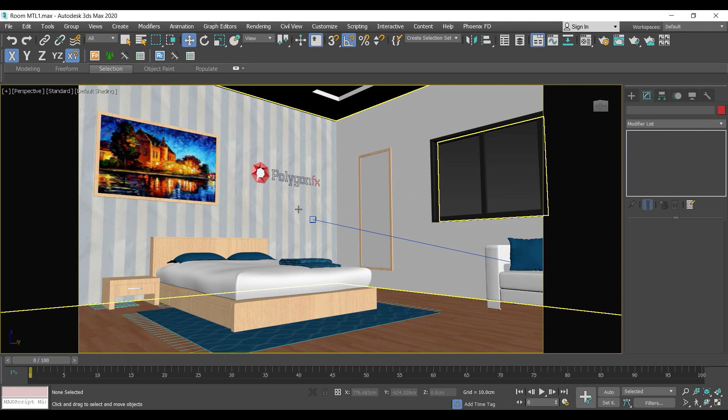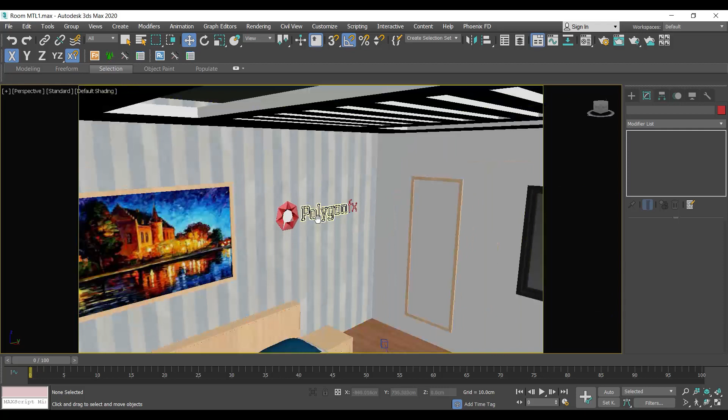I have a camera in my case, but it's not a big problem. I just added a small frame in here, and I added some kind of ceiling from the top, as you can see, so I can have indirect lighting if I want to work as an interior. I also added this logo that we've created before, and I'm going to make it like a neon light if I want my logo to lit. I created this as a 3D shape, and I'm just going to work with it as lines. I have a window, and this is my chair, and that's basically it.

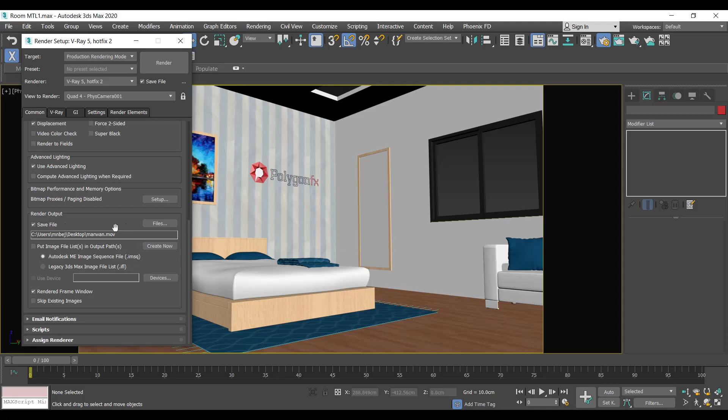It's just empty still - we need a lot of things to have inside, but I think it's fair enough to start with. I'm going to go to my camera and do a render as usual, just a small rendering and animation in here. I'm going to reset it as before - we'll talk about these later on. So I'm going to render, and as you can see, it's going to be black because I have no lights, and I have my GIs on, which is perfect.

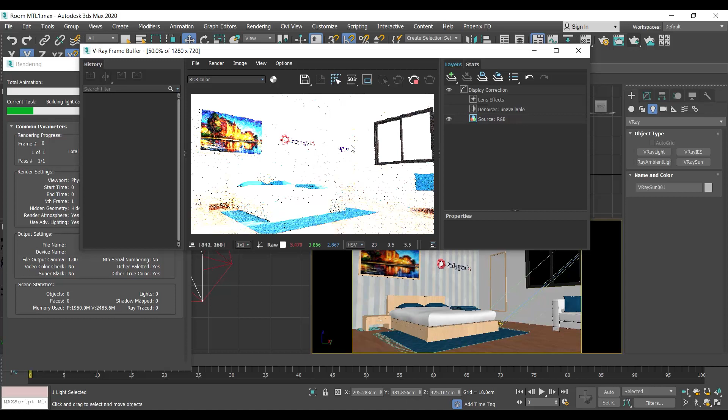Now the first thing I want to do is introduce the Vray light sun, the Vray sun. I'm going to go to Vray lights and sun, Vray sun. I'm just going to create a sun that's going to be entering the window in here, something like that. I'm going to have a sky, and make sure this sun is coming from above, and I'm going to render. Definitely in here I can play around with the values.

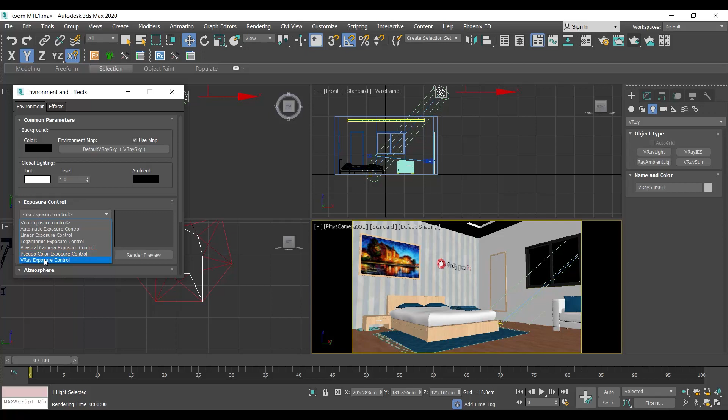Okay, great. In my case, because I have a camera, I'm not just going to work with the exposure control of the camera, because I didn't talk about them. I'm going to do the same thing as before - go to rendering, environment, add exposure, Vray exposure control, and that's it. I'm going to do the render again, so that I don't have to repeat everything.

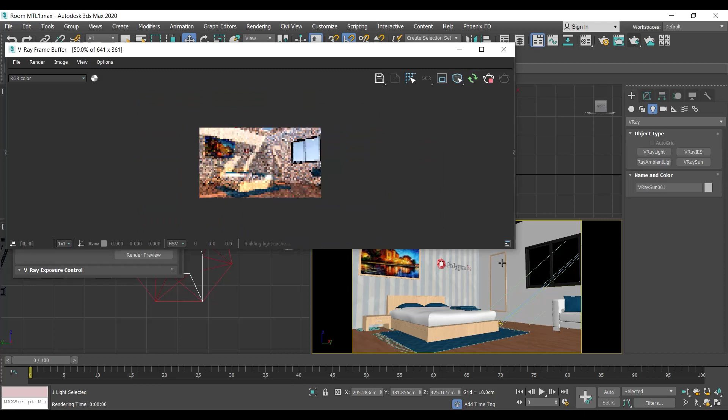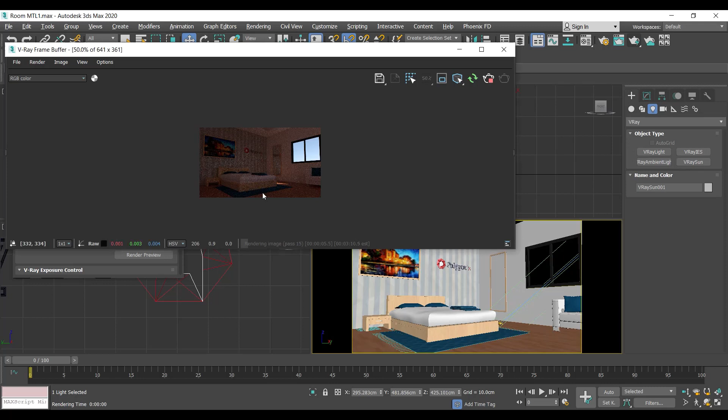Okay, great. Now, as you can see, I'm missing the ceiling from up - I just have the direct gypsum. So I'm going to pause this and right click, unhide by selection or unhide by name. I'm just going to unhide the box, because I have some other things that are still inside. Perfect. Now, as you can see, this is my render I'm starting with.

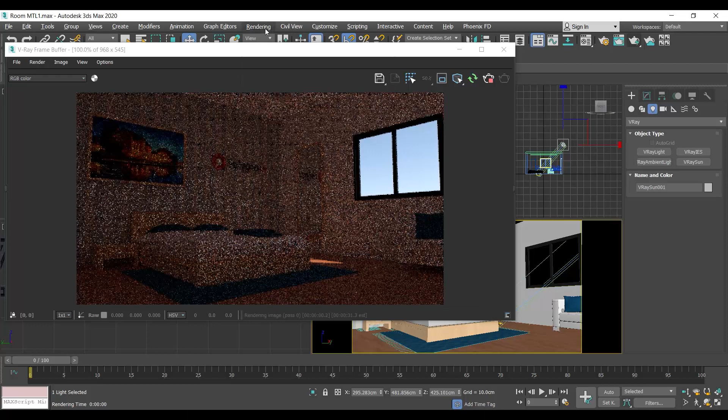So the sun is coming from the window, it's bouncing on the floor, and it's having this kind of light. I can definitely go to the sun or go to the exposure control and bump it a bit more. So I'm going to go to rendering, environment - in my case it's still opened, I think, just behind.

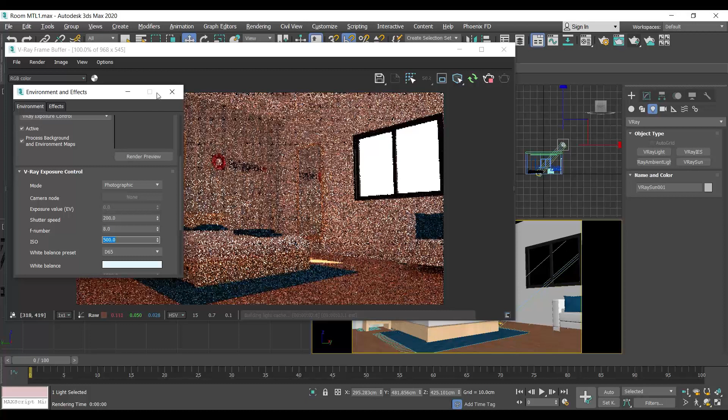Okay, and maybe have the exposure ISO at 200 instead of 100, and definitely it's going to be brighter. But if I go a bit more brighter, let's say 500, it's going to become a bit overexposed. As you can see from the window, the sky is almost super bright, and the sun in here is kind of also overexposed. So maybe I have to be something in between - I don't want it to be 500, maybe 300 should be fine, but that's it.

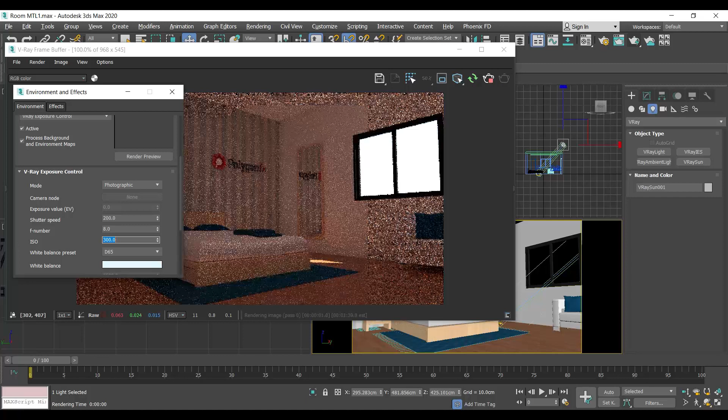So now what I'm having is just a sky and a sunlight, that's it. And this is what I'm going to get. Definitely I'm rendering low res, so I'm not going to have good quality render, but I'm just seeing the overall lighting - that's the bounce of light around the room.

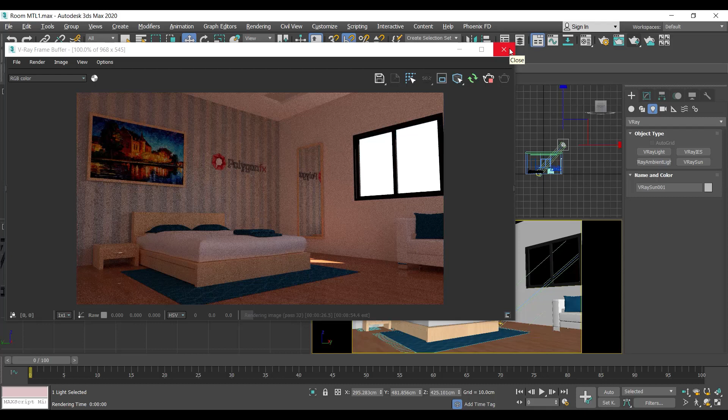Now what I'm going to do is introduce a small light which will make things sometimes better. I'm going to go to lights and introduce Vray Ambient Light. Vray Ambient Light is a very simple light - I'm just going to place it, doesn't matter where.

I'm just going to put it in a place where I can see it so I can select it anytime. So I'm going to put it here, just in the center of the image. And I'm going to go to modify. As you can see, it's just simple. I can enable and disable the light.

The light mode is going to affect the direct light and the GI, or the direct light, or just the GI. GI means global illumination or indirect lighting. So this is the direct lighting from the sun. If you wanted to affect this light, also make it brighter, so the sunlight where it's bouncing in here, it's going to make it brighter, or both indirect lighting or just GI. In my case, I want only the global illumination.

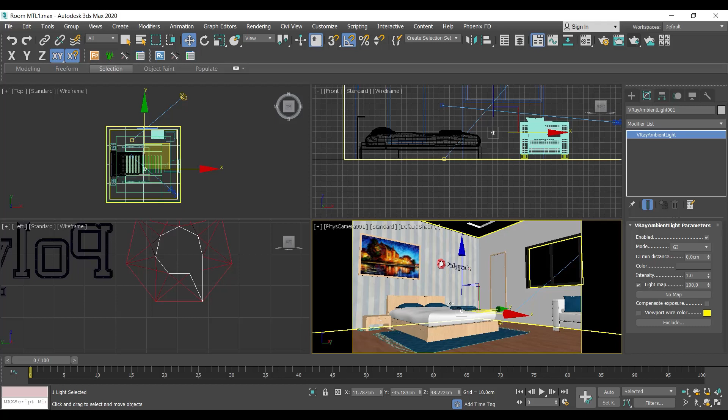I don't know exactly how it's going to be, so I have to stop this render and make it active, and I can check it from here. Now I'm going to have the color be something, maybe warm, so I'm just going to go back to warm, add a bit of warm with a small tint of blue, something like that, maybe less.

As you can see now, the scene is lit better. This is because of the ambient light I'm putting in. The intensity is 1, maybe it's too strong. I'm just going to put it at 0.5 because I want to see the depth of the light. Some places are more lit than others. I'm just going to go to 0.1, maybe 0.2.

You can play around with the ambient light. Ambient light is just a fill light. It fills up the scene with an ambience, which is a specific color and light. In my case, I'm adding it on the GI. You can add it on direct light and GI, and you'll see in here it's going to be brighter, or you can add it only on the direct light. In my case, for interior scenes, I will add it only on the GI to fill it up, and I can add a different color.

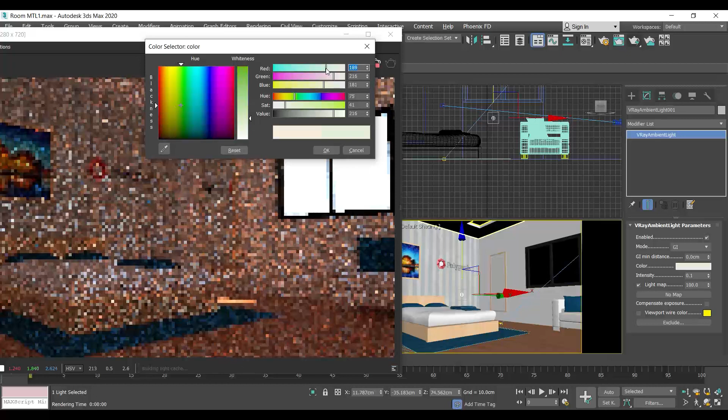Maybe I'll make it something more bluish, and add something more cool light. So maybe something like that, more light from the sky in my case. But right now it's at 0.1, so I'm going to put 0.5. As you can see, it's more lit, more blue color in the scene, and you can work with that. Now I can also add an image as a texture, to get more varied colors, not just one color like blue, or whatever.

Basically, compensate exposure is the link between the light and the camera. In my case, it's fine. I'm just going to add it without having a link to this.

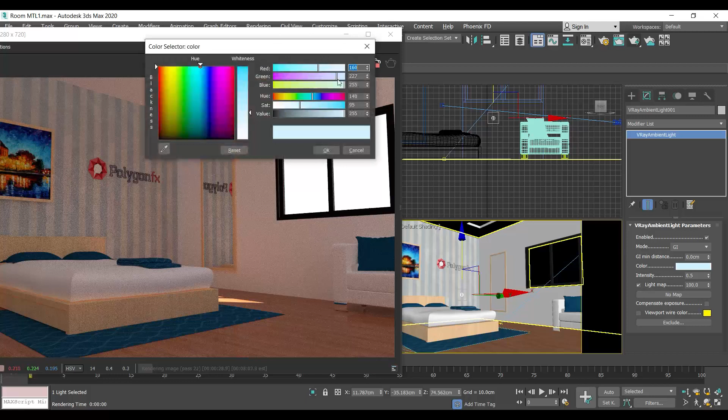So in here, as you can see, it's more blue now. I think the light is a bit strong. I'm just going to make it less blue, maybe a bit more warm, so I don't want it to be so visible. Something like that, and I'm going to make it a bit less intense.

So this is basically the VRay ambient light. Now I have some kind of interior shot with sunlight, without any other lights. Just a daylight having sun and an ambient light inside to fill up the environment, because the scene is small and what I'm getting from the light from this opening is not enough to get all the lighting.

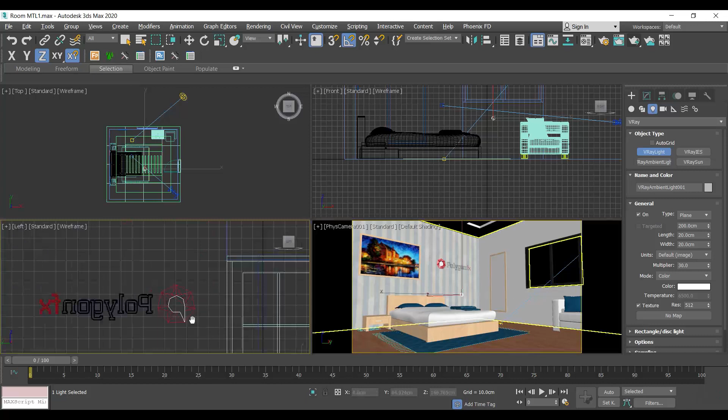Now another thing that is also useful sometimes is to have a VRay light, as I said before, on the window. So this is my window. I'm just going to add a VRay light and make sure this is outside and pointing inward. I'm just going to rotate this 90 degrees, place it on the window, go to modify, and press on skylight portal. As you can see, once I press skylight portal, I cannot affect the intensity of the light and other settings, so it's just going to be a portal for this.

Now I can just render, and it's going to add more visible light to go inside this window. I can also add the same one on the door, which is behind us.

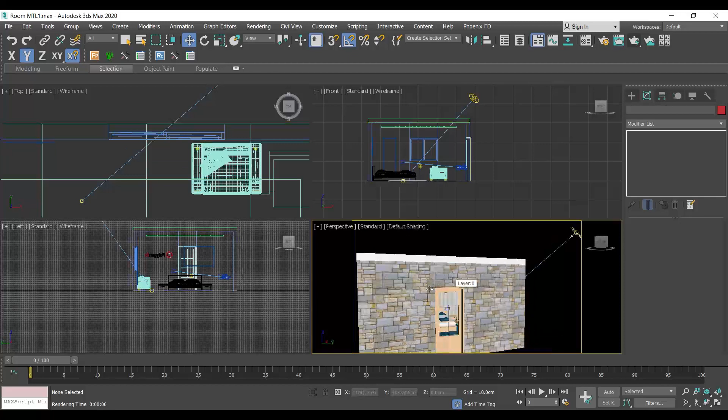So this could be another option that would help with the light penetrating the windows and the doors. I'm just going to go to perspective to show you a bit more. So this is my door because I have a glass in here, and I have a glass in here, and this is basically it.

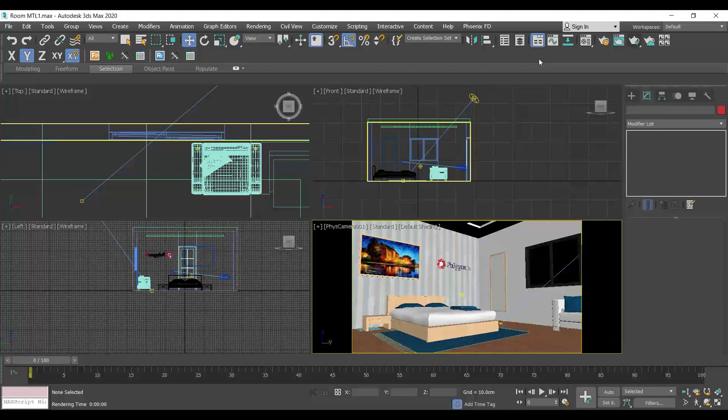Now, this is basically the first type of light I've used, which is daylight. So I just created it, and I can see it's maybe overexposed. So let me just fix this ISO, just gonna put it 100 again. I think I just didn't realize that. Okay, so something like that.

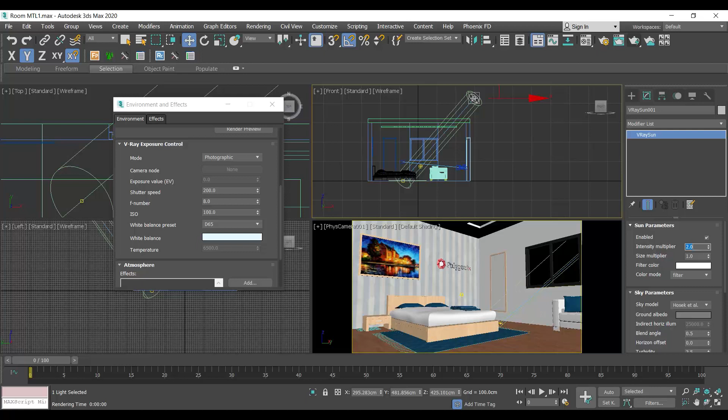I want to see the sky, I want to see the sun. I'm gonna make the sun a bit more intense, so I just select the sun and make it maybe 2 instead of 1. And I can just render it out.

So I'm just gonna make this active all the time. So it is fine, but it's a bit strong in here. I'm just gonna make it maybe not 1, not 2, just 1.5. So maybe this is what I want. Okay, it's a bright sky, and this is it.

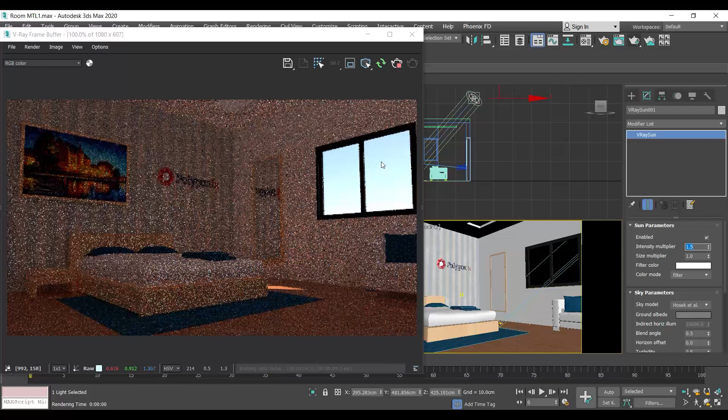Okay, great. And now the ambient light, I can make it a bit stronger, so maybe 0.5 again. I'm gonna do the same thing, just deleted it, and I'm gonna add my portal lights.

So this is going to be my portal light again. I'm just gonna make it portal. Okay, and I'm gonna copy this again and rotate it, and I'm just gonna place it on the door.

Okay, I can see it from here, so I can just scale it down. You can scale it by scale, but usually I prefer to have values. So something like that, maybe something like that, and I'm just gonna place it in. Technically, I need it to be just smaller.

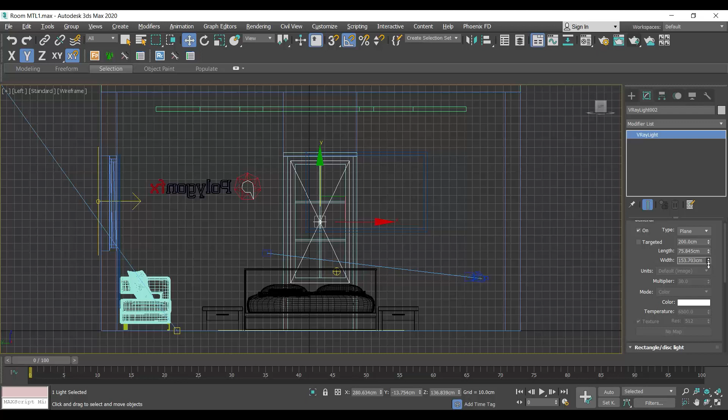I don't need it to be as tall as the door, because the opening is just in here where I have the window in here. So I'm just gonna make it as small as possible so I don't waste a lot of things going on. And I'm gonna push my light inward because the door is inside, so in here. And definitely I'm gonna have a skylight portal.

Now if I go render again, I should have more light coming in. Definitely the light is coming in still very weak. So now it comes in handy if I want to have my ambient light a bit stronger. So obviously it's going to be stronger.

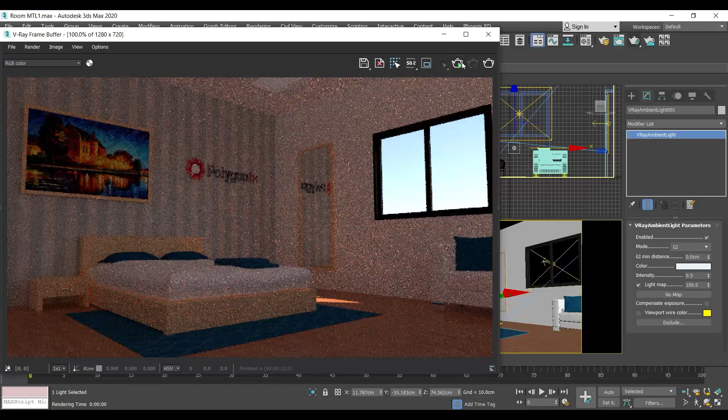So I'm just gonna make it visible, so I'm gonna make it 1. And I think this is much better. Okay? I can definitely make it 5 if I want to have it more lit, but I don't want it to be super bright. Maybe 1 or 2 should be okay. I think this is fine, or maybe 1 even is fine.

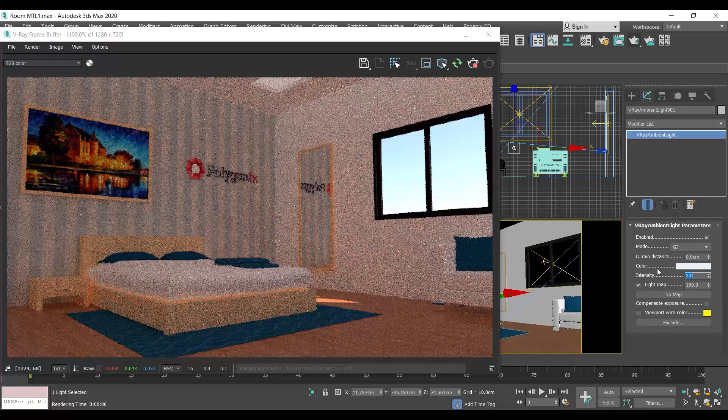And I can see now all the materials. I can see the ceiling, I can see the floor, I can see everything I want. So I can just wait a bit for the animation, for the render to kind of finalize. But I think this is basically a good thing.

Okay, that's great. Now, if I want to have internal lights, so interior lights, instead of having the sun from outside, I'm just gonna delete my sun. Okay, I don't want my sun, so just delete. And I have to go to my rendering environment. I'm gonna delete my environment sky and don't use the map.

So now I can delete also the portal lights, but in my case, they're not much of importance. And I can delete my ambient light, or I'm just gonna disable it. Okay, so now if I render, it should be black. Okay, there's no light in here. So I'm gonna light the scene from the inside.

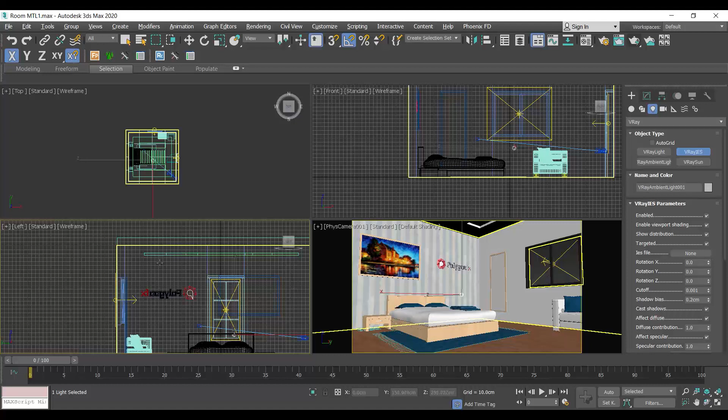Now, the first thing I'm gonna do, I'm gonna introduce a new light, which is called the VRayIES. VRayIES, they're just a simple light. Okay, I'm just gonna draw them, let's say from here or anywhere, it doesn't matter. Let's say I'm just gonna point them over this painting. Okay, so the painting is, sorry, this side. So this is my painting in here. So I'm just gonna place my light over here, something like that. Okay, great.

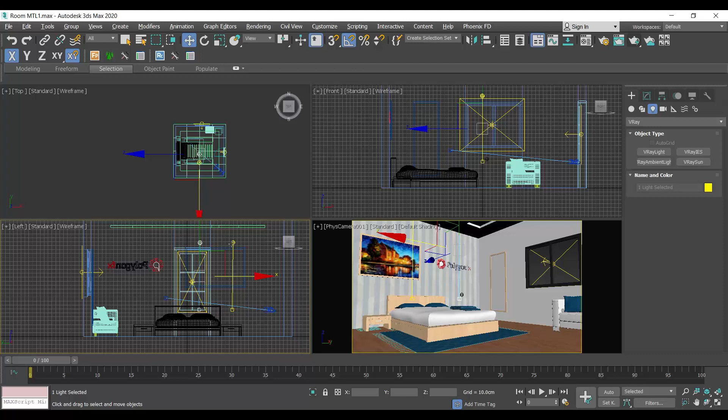I'm just gonna select them both. I'm just gonna shift and drag and copy them as instances. Now I have 2 lights. I'm just going to place them above the painting, okay, and make sure the target is going to be somewhat inward to the painting. So make sure this and this are going in. So I'm just having this kind of direction of the light, okay.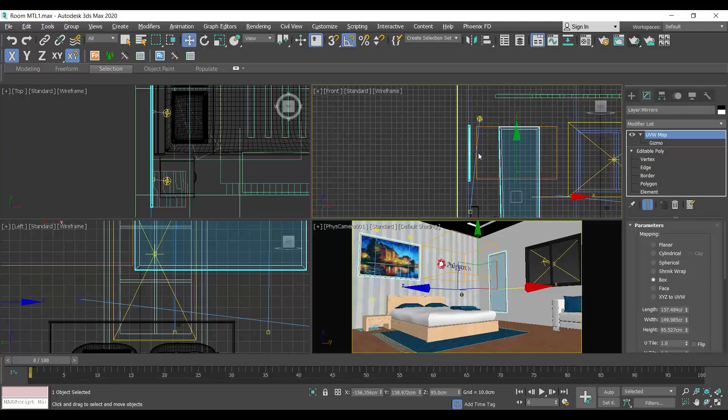So this is my painting, no, this is my painting in here, okay. I cannot really see it much. Okay, so I just have to move it inside. I'm just gonna move it inward, just so it touches the wall. So that's basically it. Great. So now this is what I got, and this is what I want. Maybe I'm just gonna select these 2 lights and move them inward, something like that.

Now, lights. Vray IES lights are very simple lights. You can just enable, disable like all the others. What I care about in the lights: I have the color of the light, and I have the intensity of the light, the power of the light, and so on. So I have all the options same as before. I have the color in here. I can use the color, I can use the temperature. I can use the power or intensity of the light, which is in here.

But the most important thing, I can just go in here and add an IES file. So I'm gonna go here and add an IES file. I'm just gonna go to my computer where I have my IES lights. Sorry, I'm gonna go to E. Okay, so these are my IES files. Definitely I can load any one of those. For example, I'm gonna load number 13 IES. I'm just gonna show you what I see. I have this kind of IES library. It has like 30 IES lights, and these are the lights.

It makes an effect on the wall. That's the only difference between IES lights and regular ones. They're very, very efficient if you're working with interior shots to have some kind of effects of the light, not just lighting the wall. I'm just gonna choose number 13, or any one you want. So in my case, I chose number 13. So this is it, and place it here.

Now, as you can see, the light is a bit different, and I'm gonna render. So you should have only these two lights, and definitely they're not intense enough. So I'm just gonna make sure my intensity value is a bit more. I'm gonna make it 5,000 in my case. As you can see, it's better now. I need it to be more, so maybe 10,000. Something like that. They are small lights. I just want them to light this.

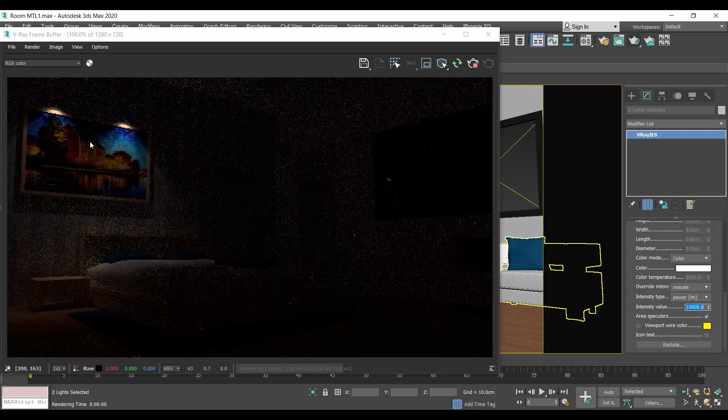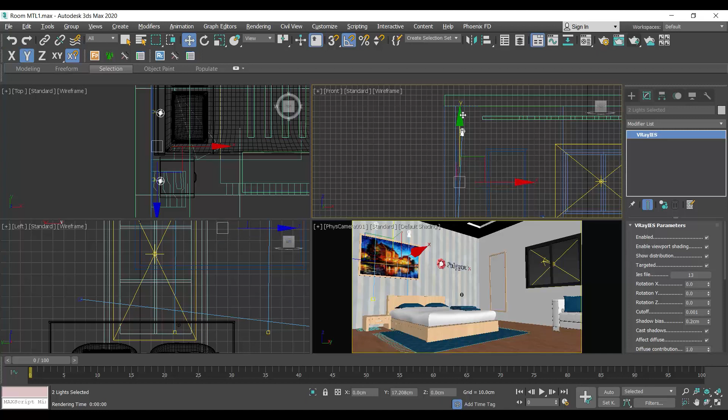And I want the color to be something warm, so I can just go to temperature and make it 5,000, which is kind of more warm. Okay, I like it, and I want them to be a bit higher because they're a bit too low for this. So I'm just gonna select them and move them up, something like that. And this is what I'm going to get. As you can see, I can have this kind of effect on the wall. It's maybe too close to the wall. I can just make it a bit further, and I got the effect that I want.

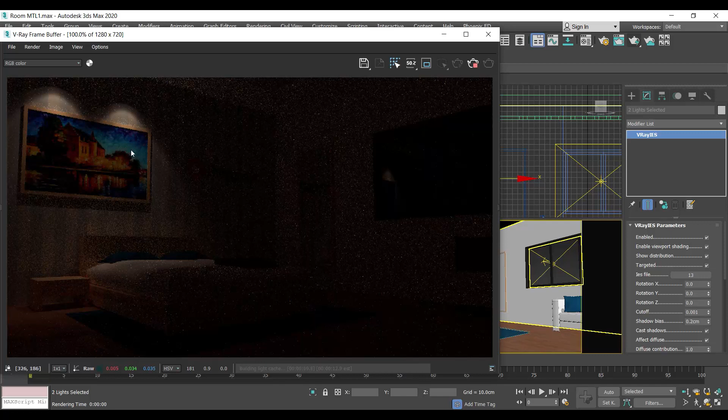Definitely, guys, in here I don't have the model. I should have a model of the light, so I can emit light from it. So let's say I'm just going to keep it like this. I liked it. This is going to be some kind of night light. Now, when I'm done with that, I'm just going to turn it off.

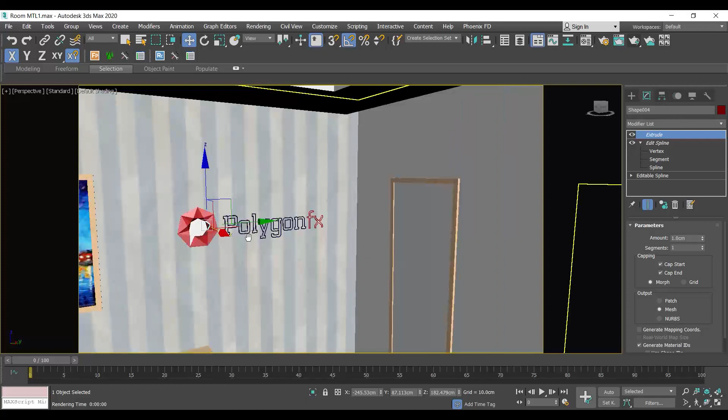The second thing I'm going to work on is the logo in here. I'm just going to select it. I'm going to work with it using Vray light materials. I'm going to go to materials, and I'm going to select an empty material. So this, for example, I'm going to put it on this and just make sure it's going to be Vray light MTL.

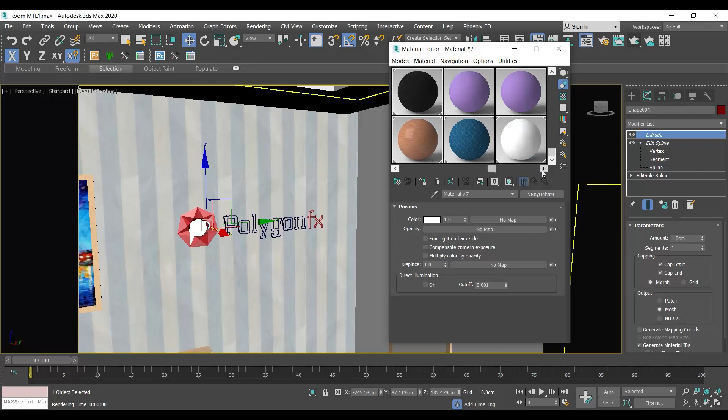VRay Light Mtl. And I want it to be white. Okay. Intensity-wise, I don't know exactly, but I'm going to start with white. Just going to get new ones. So I'm going to just select this. It's going to be VRay Light Mtl, and I want it to be red. Okay. And I'm going to select another one, VRay Light Mtl. And I want it to be also red, but it's going to be dark red.

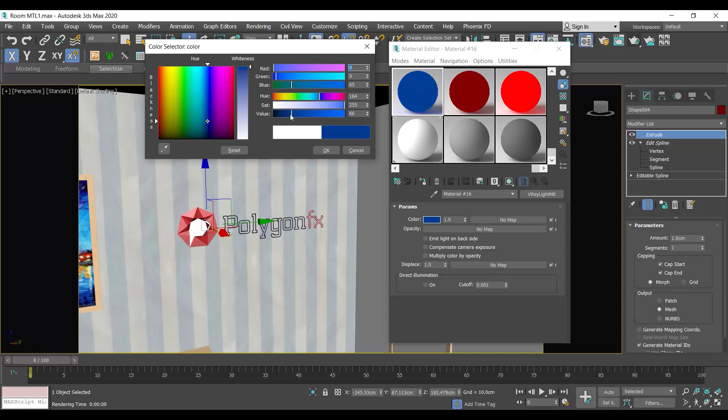And I'm going to select the third one, also VRay Light Mtl, and I want it to be dark blue. So it's going to be something like that. Okay, and I want a different color of red. So I'm just going to select one more of those. I can just copy this. I can change its name and change the color. So in my case, I'm just going to make it a bit darker, something in between. Perfect. I should have one more, but it's fine.

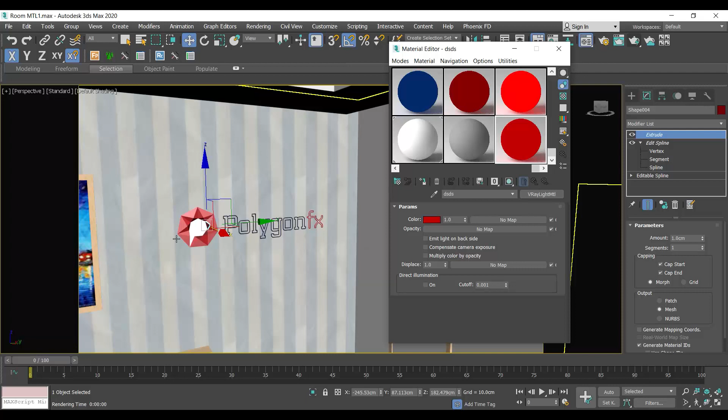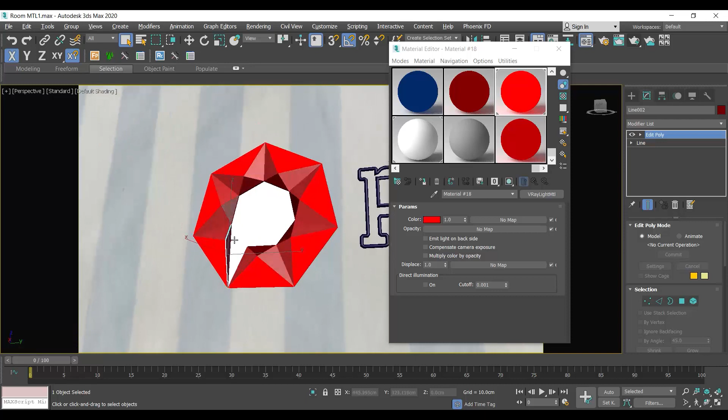So now, I'm just going to go in here, just going to make sure my VRay light, this is VRay light white. I want the regular red, which is this. So I'm just going to place them on these. Okay, it's going to be this. Dark ones are basically the internal ones. Okay, and this one in here. And I'm going to add the dark one. And as for the others, I'm just going to add the third option.

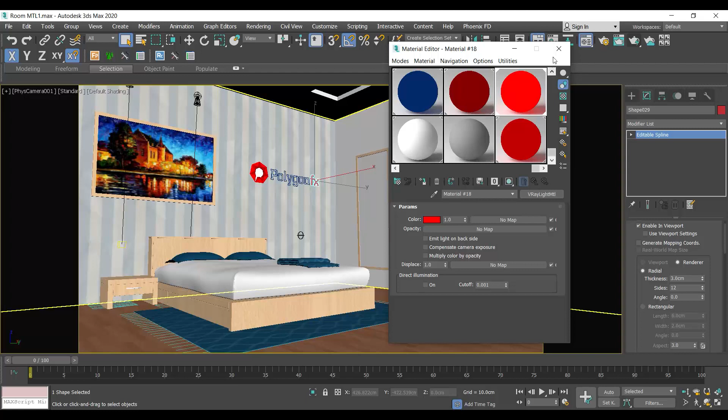As I've said before in the creation of the logo, technically I have two types of lights in here, but it's fine. I'm just going to make them one for the ones from the outside. I'm just going to select this, and I'm going to assign the blue. And as for the red one, I'm just going to assign the original color, which is this, the bright color. Okay, that's basically it. Now I'm just going to go back to the camera and let's see the render.

As you can see, the light is super dim. Okay, I just turned off this original light. I can see, but it's just very, very dim. So all I need to do, I can just work along with the parameters. So just make sure the blue is going to be 10. Now I can see it. Maybe 20. Maybe 50. I think now it's getting this kind of light, which is perfect. So this is the blue. So I'm working around with the 50 value. So I'm just going to select this, maybe also 50.

I think the red is a bit brighter, so I'm going to make it 30, 20. I think this is fine. Okay, the dark color, I'm going to make it 50 also, because it's dark. And this one, I'm going to make it 40. And as you can see, I'm just going to make it 30. I want it to be darker. If I want to see it, it's darker. So I'm going to make it 20. As for this, I'm going to make it 22. Okay, it's going to be something like that.

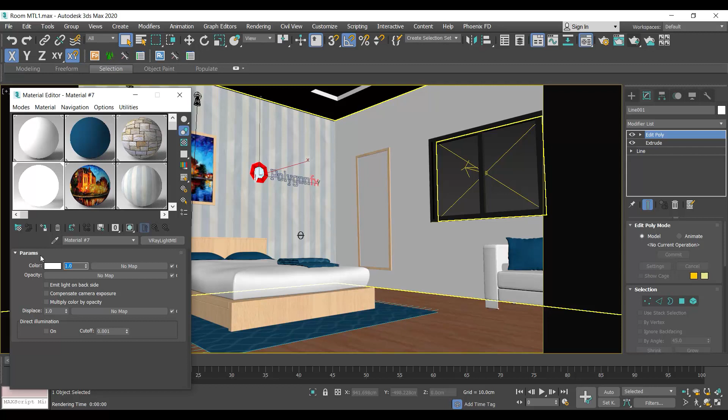Okay, I can work around with it, but definitely the white one should be worked on. So I just want to search for the white. It's here, and I'm going to make it 10. 50. Nope. Just going to make sure this is the right one. Okay, 50. Now it should be fine. Actually, it's not really moving. So 50. Now it's okay. Right, maybe this is what I want.

Then I'm getting this kind of effect. Okay, it's a small neon lighting up. If I want it to be stronger, I can make it stronger, but it's just small lights. You can definitely work around with it. So I think I'm satisfied with that. With the blue and the white, I'm fine. Maybe the dark one is not much, so I'm just going to make it 20. Okay, maybe something like that. This is what I want.

I think these are a bit too close to each other, so I'm just going to make it 20. So they should be all like 20. I can have difference in the colors. So as you can see, I can see the internal part. Okay, I'm satisfied with that. I can wait for the render to finish, or that's fine. So I think it's fine. I like it, and I'm going to stop my render. Great.

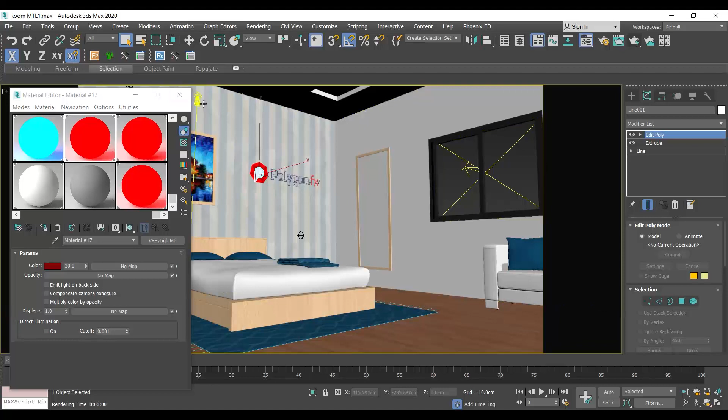I can just turn on these lights again, and I can render that again. So I can see this light with this, and you can see definitely the mirror in here. I can see this. So this is kind of very dim light. I want to introduce the main light, which is going to be the top light. So I can leave these on, or I can just turn them off. It's always preferable to turn off all the lights before introducing a new light.

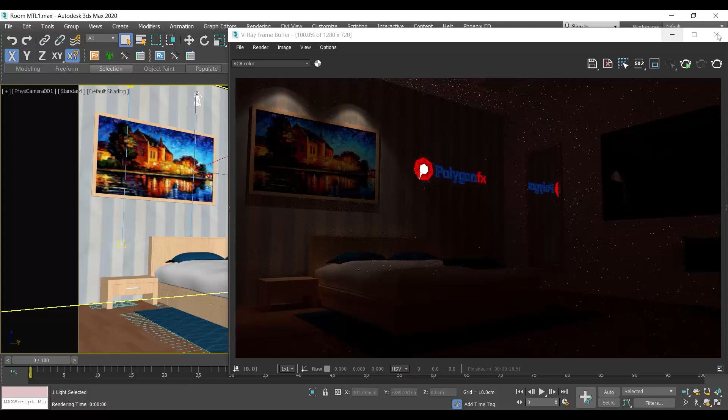So in my case, I'm just going to have an indirect light, which is going to be on the top. I'm just going to create a big light in here. I'm just going to select and isolate this. I'm just going to go to VRay light, and I'm going to snap this from here to here. The other thing, I want it to be the opposite way, so I'm just going to rotate 90 degrees and make sure that this is going to be just slightly above. Okay, slightly above. That's perfect. And now I'm just going to end isolate. This is my light.

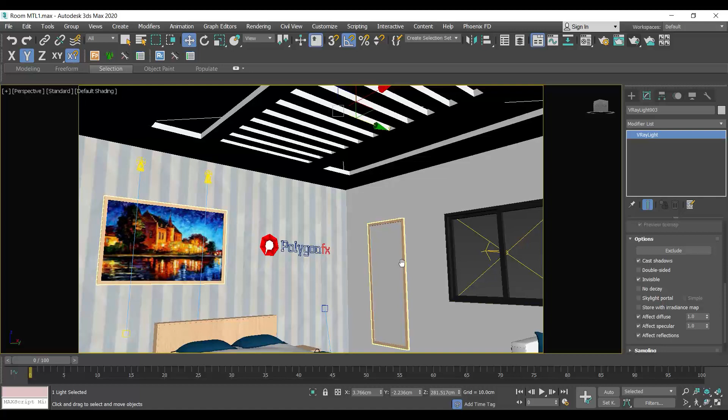Okay, just gonna go to the light options, and I want it to be invisible, because I want the light to be going out on the top, and I don't want to see it from the holes in here because I have this kind of detail. Okay, I'm just gonna show you. So this is what I'm gonna have. So light's gonna bounce on this ceiling and then go down indirectly. So this is why I put the light to be pointing up.

And at the same time, I'm just going to give it a temperature. I want it to be a bit warm, so 5800 maybe. So just a bit warm. And multiplier, I don't know, I have to check it out. And this is it. So I'm just going to render. I'm going to see the light from top, how it's going to be.

So as you can see, the light from the top is going to be lighting the whole scene, but definitely depending how much you want the light to be. So as you can see, it's a bit strong. It's lighting the whole scene, which makes sense because it's going to be indirect and it's going to be a big light. And you can see the effect in here is just minimal now. But if I want it to be more cozy light, I want the light to be there, but I want it to be less, maybe half or a bit less than half, maybe 10 instead of 30.

I'm just going to have some kind of cozy light, and have this IES light more visible, the logo more visible, and in here I'm having the indirect light, but it's not very strong. Maybe I have a dimmer and I'm dimming it. But if I have to see the room more visibly, definitely I'm going to have more light. But because I have these kind of things in here, maybe I have a logo I want to show, a sign I'm working on as a designer, I want to show it to the client, I want it to be visible, so I have to work around with the lights.

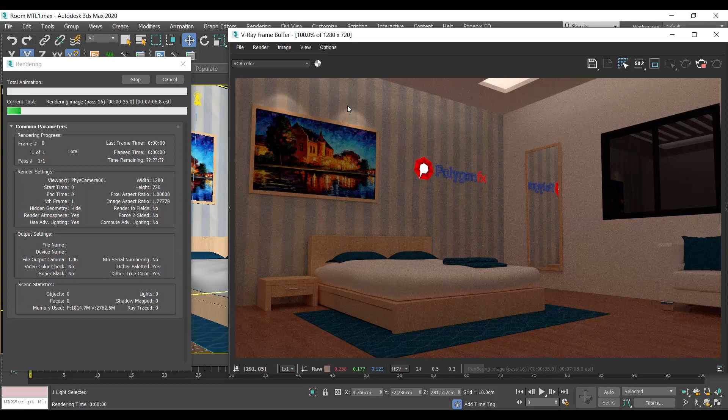In here I have two lights that are not visible technically. I should have the model so it will have more realism to it because they are pointing the light downwards. So I have to have two spots linked to the wall as models, I mean, and this is it. And I can also have direct spots in here. In my case, I didn't draw them, so I'm just going to stop my render. I'm just going to do my last light.

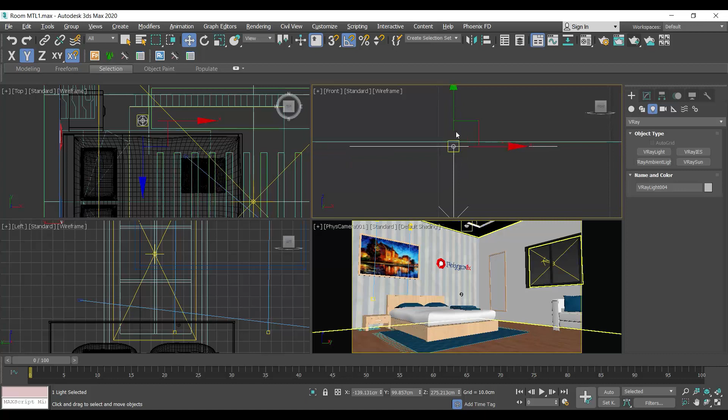So I'm going to do a light, which is going to be a disk, and I'm gonna place them on top in here just so they can be visible. So something like that. I'm just gonna point it to go up. Definitely they're gonna be snapped here. I can just keep a little bit of distance. Okay, this is it. Just gonna make sure it's okay and just isolate them so I can see. So I'm just gonna make that here, somewhere here, and I'm gonna start from here. And I'm gonna do 2, 3, 4, 5, maybe.

Okay, that's perfect. Select them all, make sure they are centered, so I can center them by midpoint, and I'm just gonna copy them to the other side, and I can definitely do on this side too. So I think it's okay. It's fine like that.

Okay, I can just do a small cheat. I'm gonna select all these lights. I'm gonna push them a bit like this, and I'm gonna make this one kind of copy so I can see it more. I'm just gonna do maybe 4. That's it. Okay. And here it's not visible, so I'm gonna see these lights. So the most important thing when I'm copying these, I'm making sure they are instances. Okay. So everything is linked together. Okay, and they should work

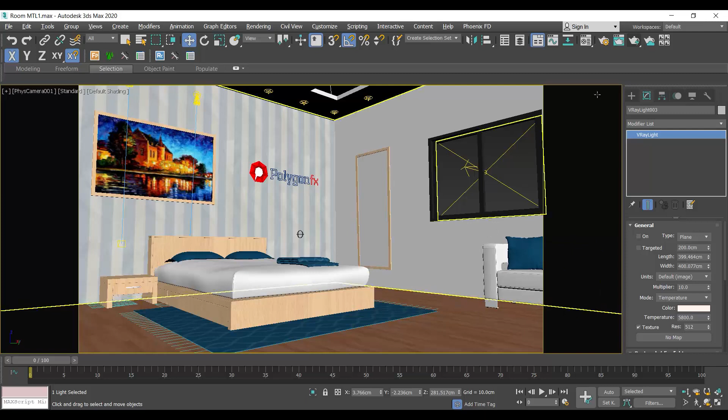fine. Now I'm just gonna select the big light. I'm gonna turn it off so I can have things more visible. And let's see what those lights are doing. Small lights. Okay, technically they're not doing anything so far. Okay, I have to just make sure what's going on. I think my camera is the problem. Let's double check. Okay, my camera was penetrating the wall.

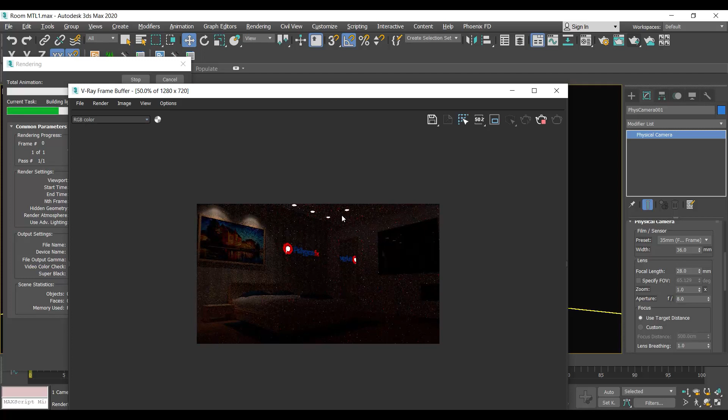So now, as you can see, I have spotlights in here. So I'm just gonna select these spotlights. So I'm gonna pause it and select any one of those because they are instances. So I just have to modify one and everything will be modified. First of all, I'm gonna do double-sided. So I want the light to be lit from up and down so I can have some kind of halo on the wall as if it's lighting and there's no space between them. That's one.

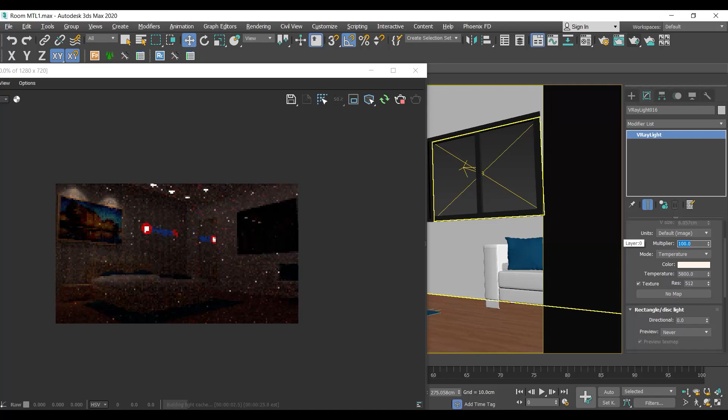Definitely I want them to be stronger and warmer. So I'm just gonna go temperature. I'm gonna make them 5800, and instead of 30 I'm gonna make them 100. So as you can see, I'm getting a bit of light, 200, maybe something like that. I think these lights should light this way, so I think I like it. I'm having this kind of light spots on the top, and everything's fine. Okay, so this is basically it.

So now the last thing I'm gonna do, just gonna go to my big light and just turn it on. But in my case, I don't want it to be very strong, so I'm gonna keep it something like 10, and let's see overall the scene how it's gonna look. So I have internal lights, I have plane, I have disk, I have light mesh, or in my case I just added the Vray light material. It's almost the same. And I have Vray IES in here, and I'm getting this kind of scene. The environment outside is just black. That's why you can see the reflection.

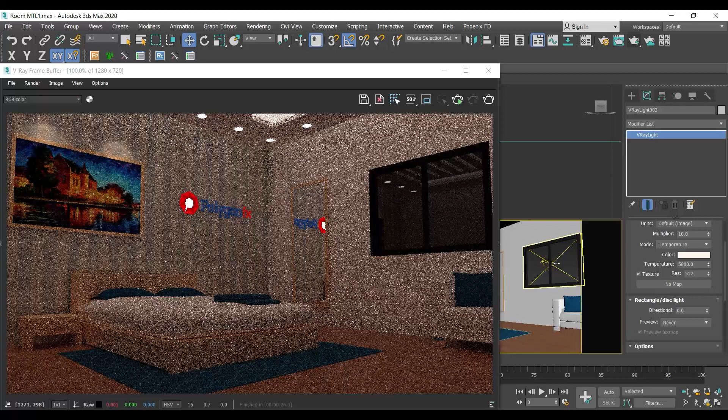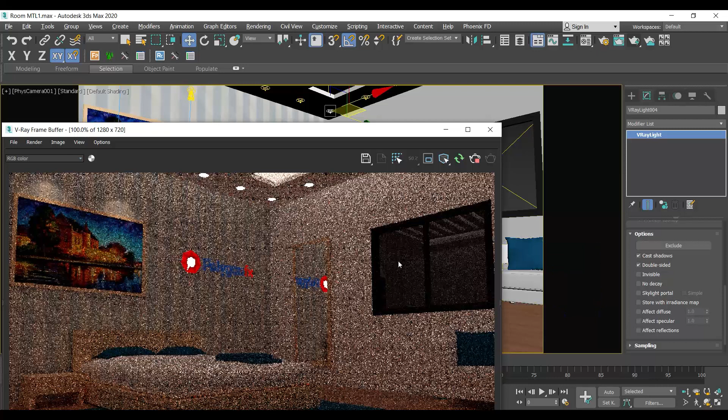So in my case, for example, these lights, I don't want to see them here. If you remember, if you go to any of those or all of them and you press on invisible, they won't be seen in the camera. But if you press don't affect reflection, now you will see that they won't be seen. So technically, if you don't want them to be visible, I'm just turning them off from the scene, from the reflection, so nothing is gonna be seen in here. But usually, as I said, we don't use them in these terms, so it's just like having some kind of fake lights. I would make them not visible.

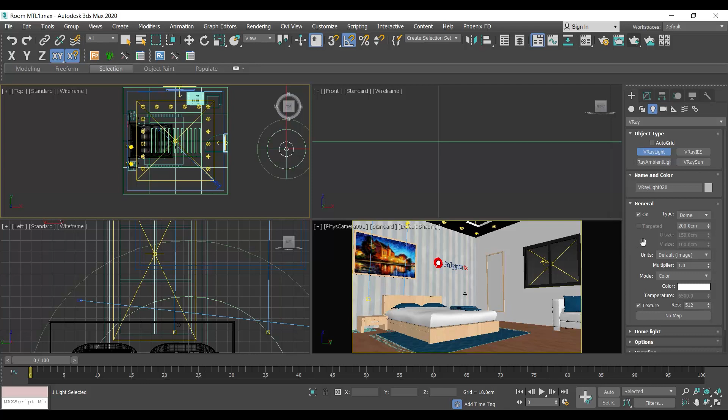The last thing I'm gonna do, I'm just gonna add one more light. I'm just making a lot of lights in here. Usually we don't need to do this much, so I'm just gonna add a dome. Just gonna place it anywhere here, and I want this dome to be kind of maybe dark blue. Just gonna make it active. Just gonna make it blue, and definitely very dark blue. This kind of like a sky, and I can make the intensity maybe a bit more, so it will kind of have some kind of environment outside.

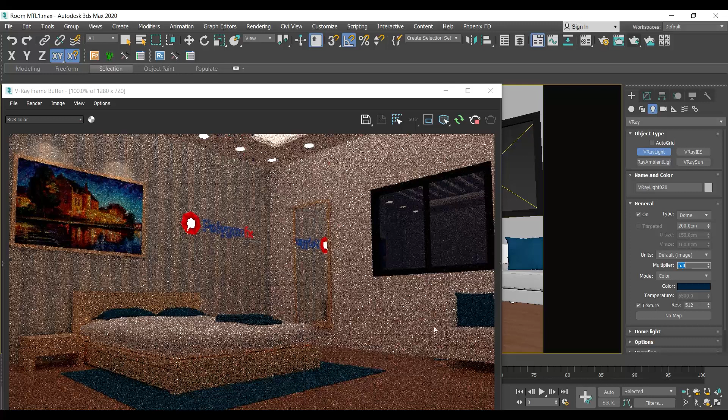But definitely I can just add a picture. Outside I can have a plane and have a picture on it, or I can add it to the environment picture, same thing. So I can get this kind of scene. Okay, so that's basically a quick practice. I just went through everything concerning VRayLight, VRaySun, VRayIES, and VRayAmbientLight.